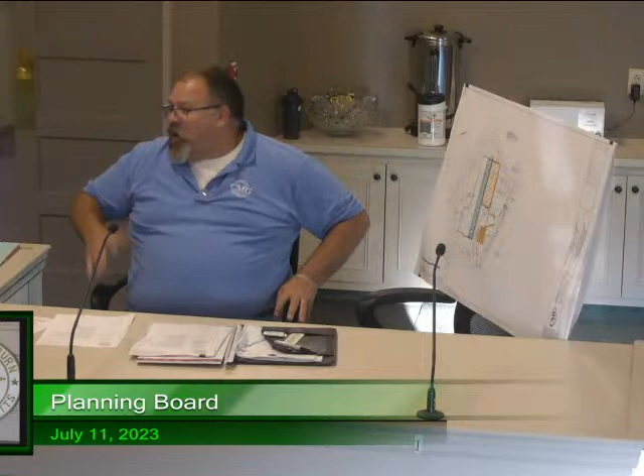It just happened to point right towards where the sewer main was in the back, so we spoke with the engineering department. They went out and cameraed the line to determine that there were no illicit discharges, so the rooftop's not going into the sewer system. That's a good thing. But the bad thing is, what are we going to do with it now? Some of our assumptions were not correct, or maybe the underlying conditions weren't well known until we uncovered it all.

Our original drainage calculations assumed all this water to flow this way, and we were looking at an underground drainage system that would treat the existing rooftop only. Existing conditions would remain as they were. Unfortunately, this wasn't the case. This was brought to our attention with more urgency a few weeks ago. We immediately reached out to the engineering department and met on site with them.

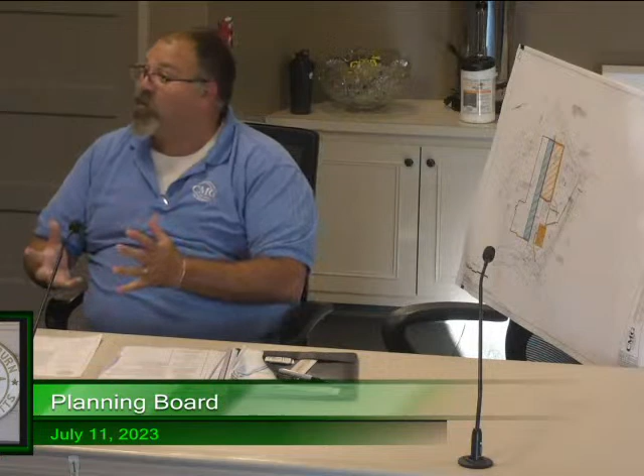They recommended that we make sure the Conservation Commission is comfortable with our proposed improvements, which I'll go over quickly in a moment. So we immediately got on one of their agendas to talk about the proposed changes. We didn't have a formal design at that point, but wanted to give them a heads up as quickly as possible. We had that meeting a couple weeks ago, a site walk this past weekend with the Conservation Commission, and we're going to be in front of them as well to review this.

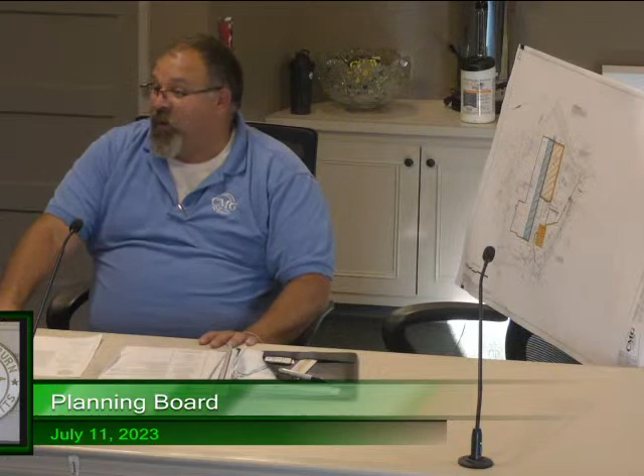We also took the initiative to work with Mr. Bernard and get Graves Engineering on board sooner rather than later, because we're in the middle of construction. We don't want to prolong anything with exposed surfaces. We want to get the project done, stabilized, and out the door. Graves has reviewed and just provided this afternoon a letter stating that our calculations and proposed modifications are in order engineering-wise. Those modifications are,

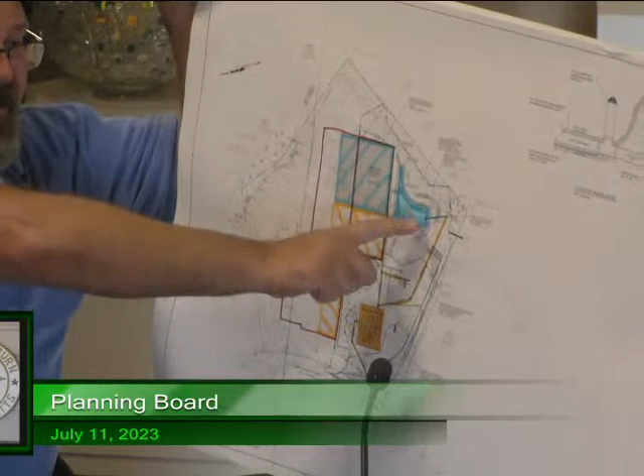That equal area is the blue area here. So what we're proposing is just to have a small above-ground basin. It's a minor depression, only about 2.5 feet deep, to collect the rooftop drainage only, detain it, and then outlet towards the wetlands in the back.

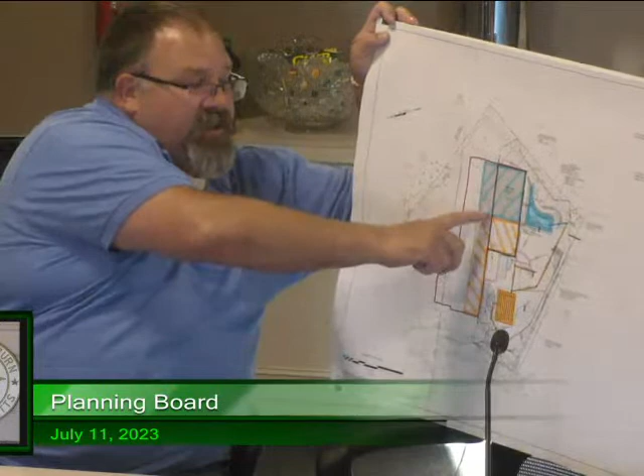So all of this work falls within the existing limit of work and disturbance. We're not expanding our development footprint anywhere, in any location. We're just looking to implement a minor drainage basin, very small in nature, to detain what we originally thought was just going away, off to the pond. So, with that, we took the initiative, worked with Graves.

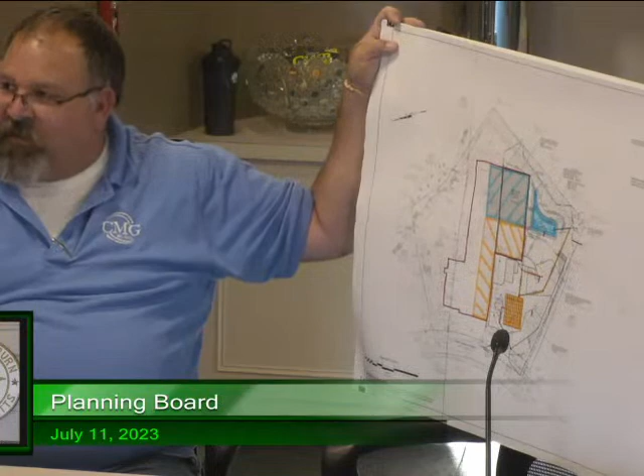I think they're in agreement with our findings that this is sound engineering practice, but we need to speak with the board to make sure we are in agreement that this is a minor modification. We can move forward without subsequent permitting or anything else that may be necessary.

So with that, I'll open it up to the board for any questions or comments you may have. Anybody have any questions?

Sharon? Roger? One question, actually for you, Jim, what is the timeline? I know construction's ongoing, so what is the timeline you're looking for from an approval standpoint? Because we haven't reviewed the Graves work yet.

From a timeline, we took the initiative to get this done. So the timeline is as soon as we are able to get a comfort level from everybody involved, which will be the planning board as well. Conservation Commission, we are set to meet with them on the 26th of this month.

We just received the Graves Engineering letter, which supports our engineering calculations. I'm going to initiate that with the engineering department as well, because we also need to update our land disturbance application from them, just to make sure that they're on board. So it's kind of a trifecta. We need to talk to Concom, Planning Board, and Engineering, and they're all moving forward.

So we're doing this as expeditiously as possible because it's an existing construction site. We want to keep it moving, and really, this is almost the last piece of lipstick that we have to put on it. Paving should be happening this week for the parking area up front. And the last remaining items are just trying to handle that drainage discrepancy from what the original plans were.

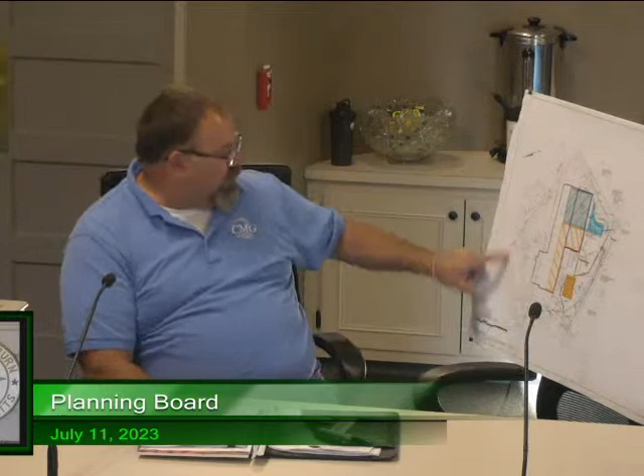When all is said and done, is the entire lot fenced in? The entire, no. There'll be a security gate here to prevent anybody from off-hour deliveries and things of that nature, but it will not be completely fenced in all the way around. You could walk around and get in.

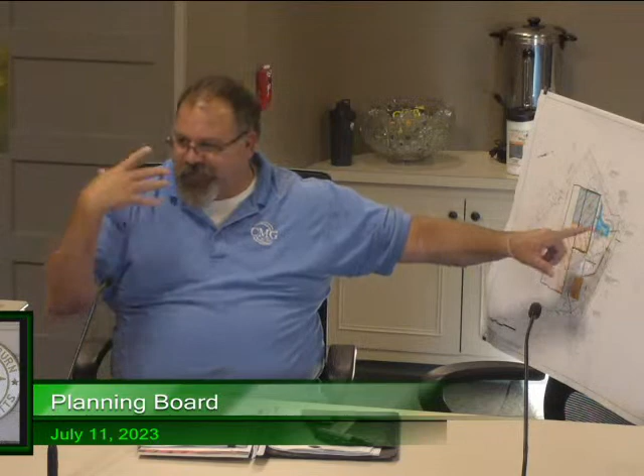My only concern is after rainstorms like this week, if that's 2.2 feet deep, you get some kid down there on a weekend, because he can walk around right to it, and we need to put a fence around that area, like a 4-foot little chain link fence. This is truly a detention area, so our pipe is to dewater. We're not infiltrating, the soil underneath this isn't really indicative of infiltration practices. So we actually have an outlet pipe. It will flood up, but within several hours it will drain because it's not truly a retention pond, it's a detention pond. So we're really just slowing the water down, we're not accounting for any infiltration.

So you'll find it dewatering much quicker than you would a normal infiltration basin.

May I have a motion to approve with conditions? Two motions, a motion that it's minor, and a motion to approve. A motion that it's a minor change? I'll make that motion. May I have a second? I'll second. All those in favor? Sierra? Marquez? Jason? Ron? Aye. Myself, John Regan, aye.

May I have a motion to condition this with approval from the Conservation Commission, the Engineering Department, and the Building Commission?

So moved. May I have a second? I'll second. All those in favor? Sierra? Aye. Marquez? Aye. Jason? Ron? Aye. Myself, John Regan, is an aye.

Now may I have a motion to approve this based on those conditions I just placed? I'll make that motion. May I have a second? I'll second. All those in favor? Aye. Aye. Aye. Aye. Myself, John Regan, is an aye. It is a vote. Thank you very much.

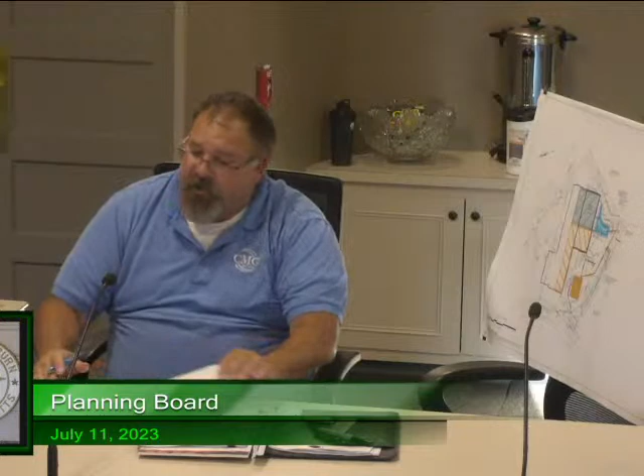You're all set. Good luck. Thank you very much for assisting and helping us get that letter from Graves as soon as we could. It's very important to keep things moving, so we tried to do what we could. Thank you all. Get to a decision later this week. Yeah, perfect, thank you.

Okay, next on the agenda is reorganization of the planning board. We need someone to nominate someone to be chairman.

I'll nominate John Regan as chairman. I'll second it. All those in favor? Aye. Aye. Aye. May I have a motion to nominate a vice chairman?

I'll nominate Davros as vice chairman. May I have a second? All those in favor? Sierra? Aye. Well, you can't vote. Aye. Aye. Myself, John Regan, is an aye.

The town has 3 delegates and 1 alternate to the commission. Planning board is responsible for appointing 2 of those delegates. Traditionally, at least one of those delegates has been somebody from the planning board. In the past, the other delegate's been a staff member.